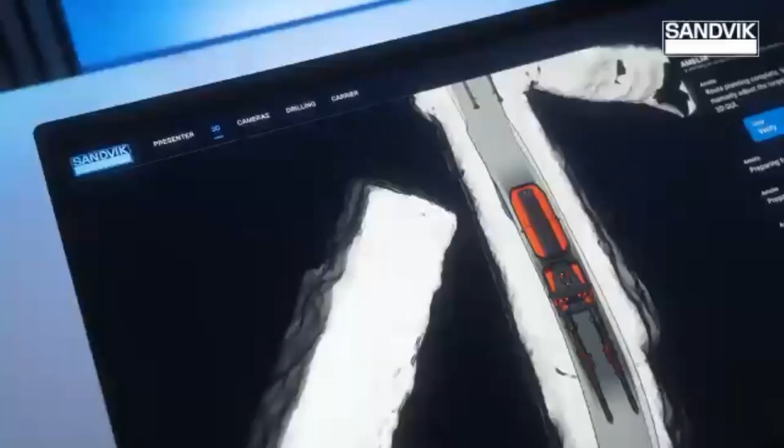Okay, excellent, thank you very much. So now I'm going to a really wild video. You got to admit, it's impressive to watch. The music, great - I think I got caught tapping to the beat and I wasn't on mute there.

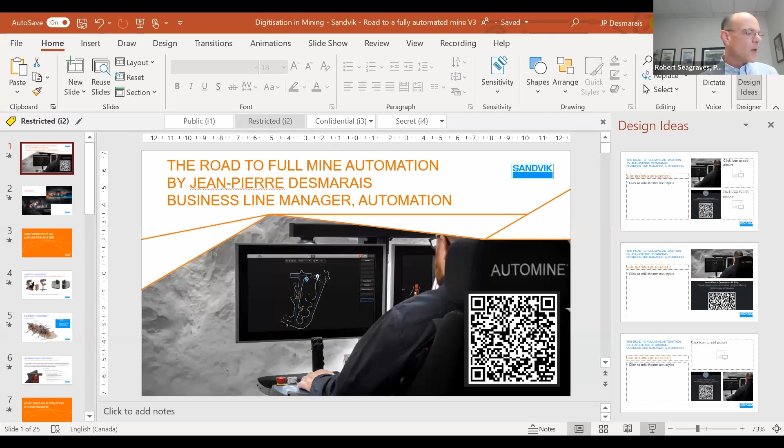I hope everyone can hear me well. Thanks for having me, it's a pleasure to be presenting to you guys today on behalf of Sandvik.

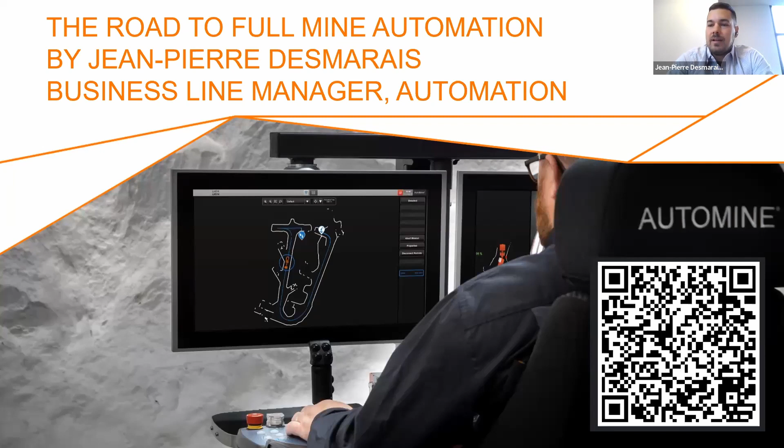We wanted to start this conversation with a bit of a technology video to show where we're at. I think, for myself and for the general public, it's important to know the commitment that Sandvik has toward investments in technology for mining. Amelia is certainly a big step forward for us in testing new technologies and bringing that forward to the mining industry, and we are committed to this by doing these concept vehicles.

We started 3 years ago with the concept loader, which was cabinless and used 3D LiDAR technology. We were able to test some of the early technologies that we're going to put in our equipment moving forward. So I think these concept vehicles are the testament to our investment in technology.

What I want to cover today is a bit of an overview of what an automation system is about, where we're going with it, what our vision is, and what you guys can expect from us in the future.

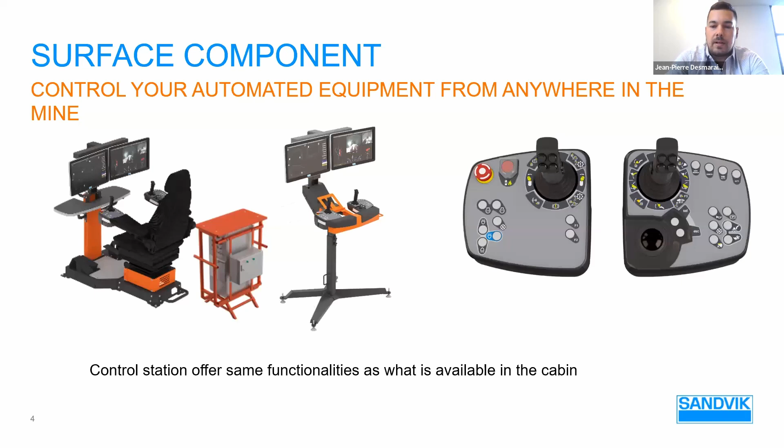So what are the components that you need for efficient automation operations, especially underground, though surface is similar. The first component would be the control room, where you need to be able to access the machine, communicate with it, and drive it. So you need the control system - we have 3 types: one is a specific chair, we have a pedestal stand that could either sit on surface or close to the area where the equipment is to work, or a desktop control system that you can see.

There's also the equipment component. This is an example of a loader, but it would be the same type of equipment you'd see on a truck, a surface drill, or even an underground drill. We retrofit our equipment with cameras, LiDARs, scanners, and computers to be able to control it from surface or away from the equipment itself, so it's drivable. To give you an example, for Sandvik equipment to be able to be automated, we're looking at anything past 2015.

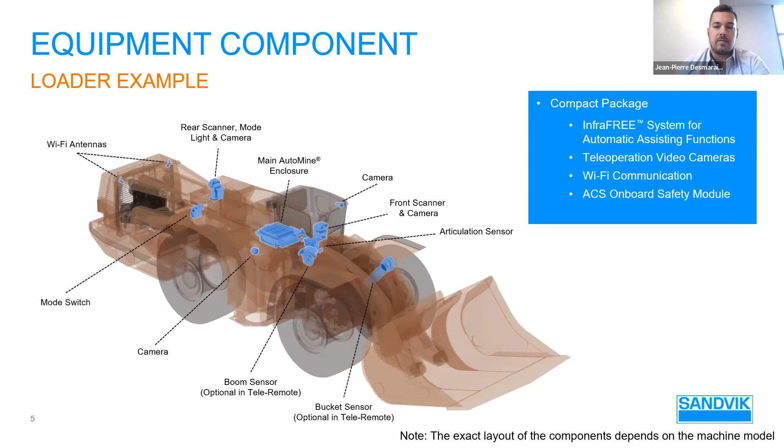The control system prior to 2015 is usually too old to be remotely operated from a distance. Line of sight mode still applies, but for complete autonomous operations we typically require a 2015 or younger machine to be automated. In the production environment, these machines usually get replaced within that time frame, so we usually find that type of machine.

In the underground component, current technology doesn't allow us to unleash the machines into work areas where you have manual equipment and pedestrians walking around. So we have a high safety standard, and we need to isolate these machines to make sure there's no collision between an AutoMine vehicle and a pedestrian or a light vehicle that's parked.

So there is a need for a physical person to come into the area to clear it, to make sure there is no obstruction in the work area, that it's deemed safe to operate in automation, and then we can resume automated operations.

We use two different types of barriers, one on the manual side and one on the automated side. The reason being is if the equipment were to malfunction, it needs time to stop between the light curtains before it hits the other one. And the same thing applies from the manual side.

So we calculate the distance between the light curtains based on the maximum speed the machine can reach on the actual decline. It's a simple calculation, but we make sure we have a safe distance so that in any type of circumstance, the equipment will have time to stop between the two light curtains.

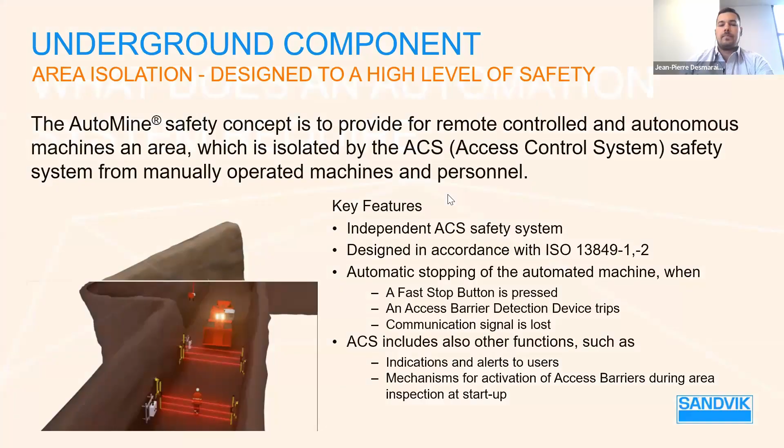So what does this automation system require? We're very demanding on network infrastructure underground, because we have standards for bandwidth and latency that are pretty high, especially for video. Usually the biggest demand on bandwidth for underground mines is automation.

The two major trends we're seeing across Canada and in the industry are LTE and Wi-Fi. From my personal experience, a lot of legacy sites that already have Wi-Fi infrastructure will continue down that path. Usually the newer projects or newer phases of mining will move into an LTE solution.

For us, we are network agnostic, so it's important that we can connect to a Wi-Fi network, LTE network, or even a 5G network. We just need a sufficient external client, and then we can connect to any type of service provider. We've worked with Nokia, Ericsson, Ambra, different types of providers, which is fine for us.

We are network agnostic. One advantage we see with LTE is there are far fewer handovers between access points, since there aren't as many access points going underground. Where we struggle with coverage underground for Wi-Fi is during that transition from access point to access point. Sometimes we lose communication and then we lose the machine.

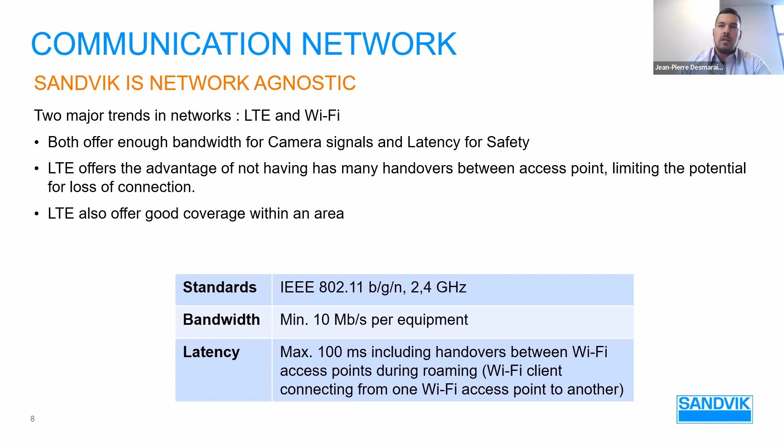In the automation system, the importance is continued communication. If you do lose communication, the machine will revert back to the safest situation and go to an e-stop, and you have to reconnect to the machine. The LTE has proven to be very reliable, although a lot of machines are currently run under Wi-Fi.

So what are we doing today with Sandvik Canada in automation? As you can see, there are quite a few different ways to run an automation system. There's a teleremote way, an assisted teleremote, auto cycle with manual activation, and fully automated.

Some of the operations are being done teleremotely assisted, and some of them are completely automated. One important thing to mention is a robot is very good at repeating the same task over and over again. A lot of people ask us if it's possible to run a fully automated cycle in a stoping application. It is possible, but it's a bit difficult, or even for a dumping into a truck operation.

We usually recommend people run that in teleremote, because in a stoping application, for example, it's very important for the bucket fill to be quite consistent, and the loader itself is not good at aligning itself to where it needs to be in the muck pile.

If you look at a block cave application, it works quite well because the drawbell will always bring the material in the same spot. So the loader can come in and pick up the material easily and have the bucket fill be efficient without any operator intervention.

The same thing applies in dumping. If you dump into a truck, the distribution across the truck is very important, so manual input and where the material sits based on fragmentation is quite important. In a truck loading application, we recommend having a teleremote operator coming in with some assistance of the equipment, but still manually teleremotely operated.

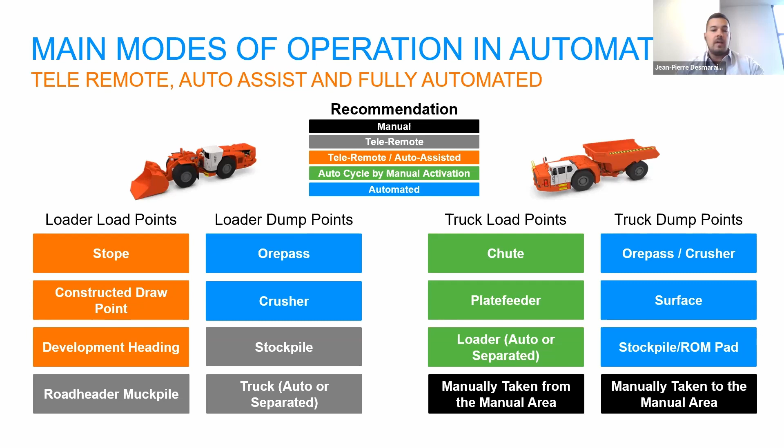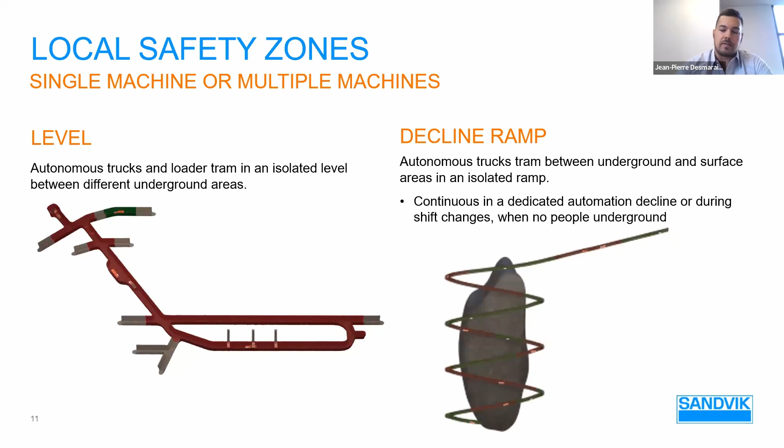Some of the approach we have is usually the entry to automation is local safety zones, where single machines or multiple machines will operate either on a level or in a ramp. It's an isolated zone that can work between shifts, or even during the shift. If it's on a level, you can subdivide some of the zones, but that's really where people start, between the shift, doing usually muck to remuck application, and then maybe loading some trucks during the shift from an isolated zone.

Some of the earlier applications we see, Glencore Kidd Creek is one of them. They have multiple loaders running with multiple chairs from a single control room. They are quite successful, and the numbers we see is the multi-machine system has been quite successful in increasing production effective hours by 30% compared to conventional loaders. So we are tapping into unused hours of operations that typically weren't tapped in before automation was available.

Then we could look at some hybrid models. We are using a lot of dynamic zones at the moment, so you could subdivide the level into multiple smaller zones, depending if you need to access a drill, for example, if you need some work to be done. We are able to merge and split zones as manual equipment needs to travel in certain areas.

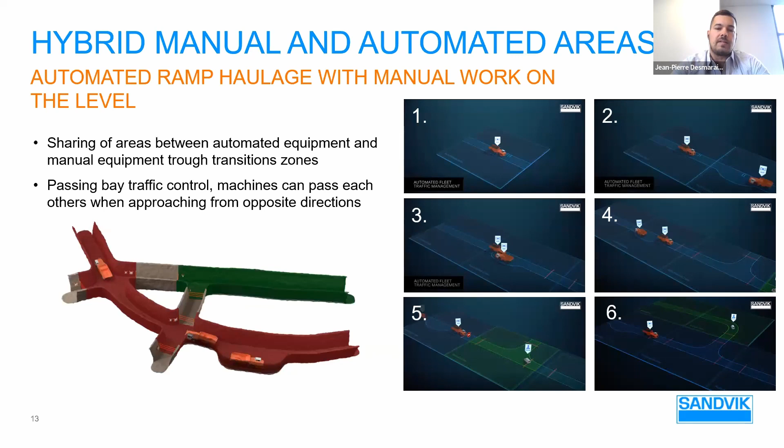You can see from 1 to 6 here, where an automated truck would wait for a zone to be automated. And then once the manual person or the manual equipment has cleared the zone, it becomes automated. So we're able to dynamically move from an automated situation to a manual situation. But the equipment itself always needs to be isolated from any pedestrian or manual equipment.

Hecla Casa Berardi does have a transfer level that they use, and they're quite successful. It's a closed off area, so they have the chute and they have a dumping area. They have the operator manually operating the chute, filling the truck, and then it goes to a dumping area.

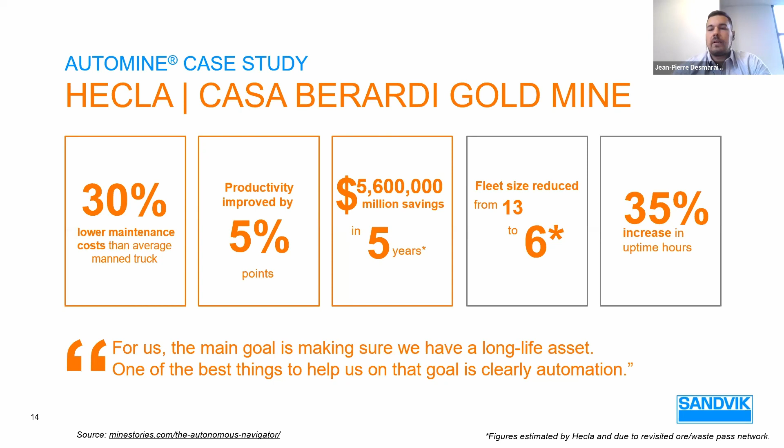And then the next level for us is really full mine automation. We call it fleet automation. It brings in the next level where we have traffic logic, interaction between different types of equipment, so loaders and trucks can interact with one another, different equipment types. Some of the drillings we're integrating, I'll touch on that in a bit, but it's really having a priority of equipment.

For example, there's a loaded truck coming up the ramp, and there's another truck coming down the ramp which is empty. The truck coming down the ramp would know somebody's coming up with an automated loaded truck, and would go to a passing bay and let the loaded truck through. So there is a prioritization, and there's even queue handling where, let's say there's 2 loaders coming into an ore pass, one loader gets queued first, and the priority loader comes in and dumps its muck into the ore pass first, then waits for the queued one to get out of the way and go back to the muck pile before it goes into the ore pass and dumps.

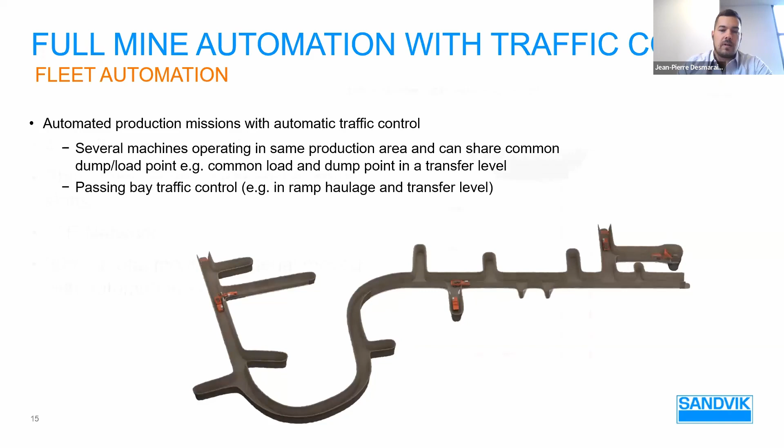So in that case, we can go up to having just a gated surface, and the whole mine becomes an isolated zone, and then we can run multitudes of equipment together into that zone. LZ5s in that case, they run 4 LHDs and 4 trucks between the shifts, and also on weekend evening shifts. The numbers are pretty impressive of what they're able to do there.

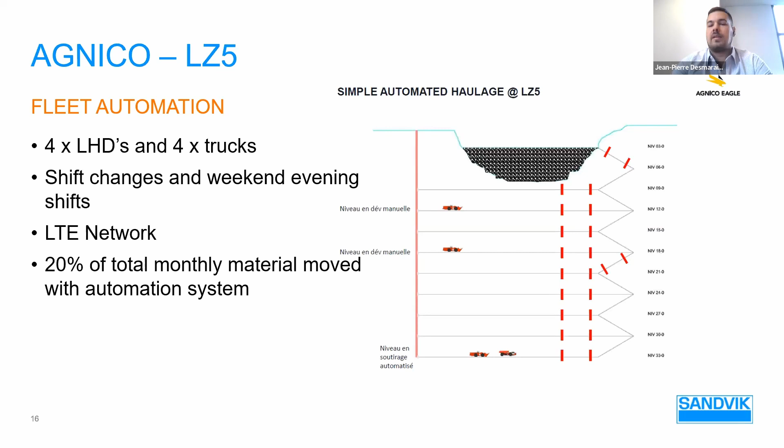They're up to about 20% of their monthly material move with an automation system. So in their case, automation is not an addition, it's something that they expect the mine to produce with. That 20% is not on top of their monthly targets, it's part of their monthly targets.

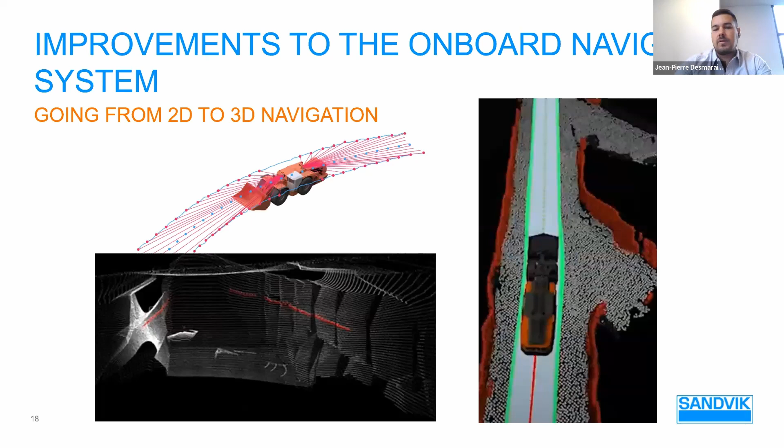In a 3D environment, you're always comparing yourself to the mapping, and then you can see if there's variance from the map. We're at that point where we're going to start doing a lot of 3D mapping using 3D LiDARs on light vehicles instead of using production equipment to do the mapping, and then slicing that into a 2D environment, and even using 3D LiDARs for navigation, like we did for Amelia, where she would position herself in the drift on her own, and then level herself into the right position. So 3D navigation is the way to go, and it's coming in the next short while.

The other aspect that we're working on is really interoperability. As most of you know, probably in automation systems right now, the load and haul sits on one side, the drilling automation sits on the other, and then all the auxiliary equipment sits outside of any OEM equipment. So we are working on providing more interoperability between equipment providers, and also between our own equipment, to integrate drills into the system, to make sure that, let's say there was a loader, it would know that the drill is there performing its work, so it won't enter that space. So interoperability is quite a topic at hand, top of list for us right now for 2023 in automation.

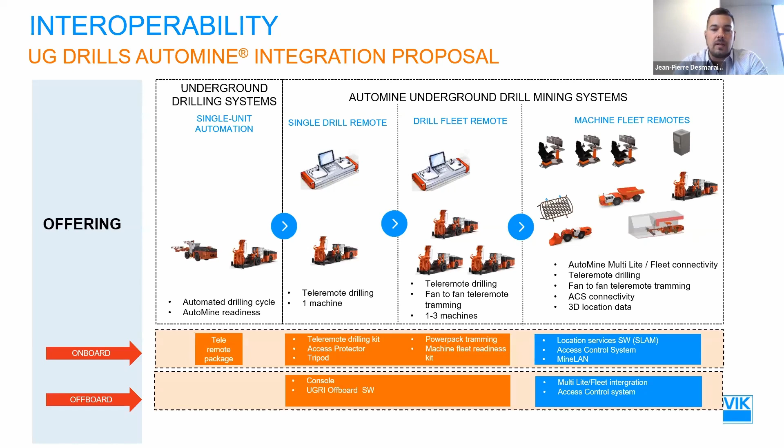So what's missing for a fully automated mine? Certainly for us at Sandvik, we are acquiring a lot of technology companies. You saw us acquire Deswik, and it goes back a bit to, sorry for jumping backwards, but to the interoperability. We want to be part of the whole mine plan, from the early design of the mine with Deswik.CAD, all the way to the operations management into Deswik.OPS, and then to the operations into automation and so forth. So we want to be part of that full mining cycle.

The other company we purchased is Newtrax, which is developing a collision avoidance system. And for us, that's really the next step for the automation system to be unleashed through manual people and machines. So I have 2 quick videos I want to show you about where this is going.

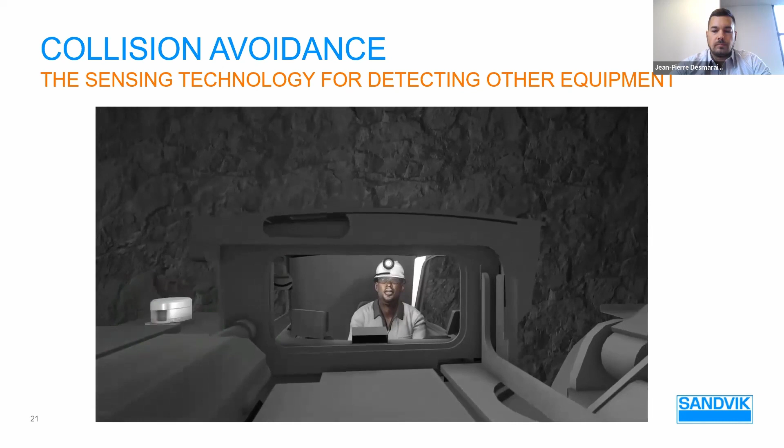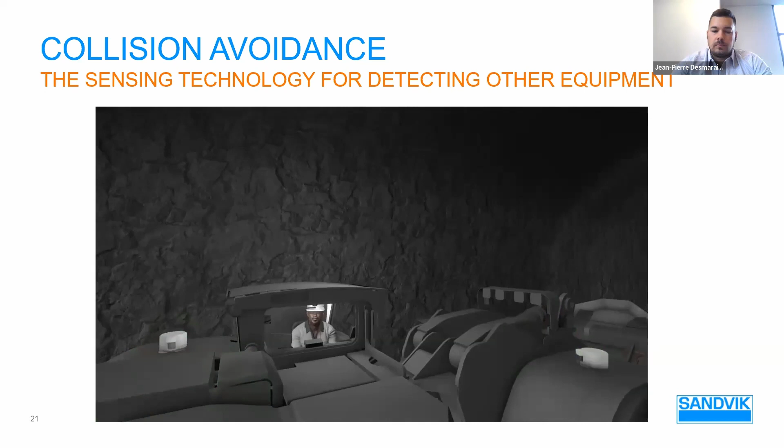The underground environment is full of hazards. We all have the responsibility of managing the risks associated with these hazards. In doing so, we can all work in a safe way and return home safely. Luckily, we have technology to help us manage these risks. The new CAS system can save the lives of your fellow workers, and maybe even yours.

Look, this is the new equipment I have been given. It tells me where all the hazards are around the machine, through this multifunctional display. It observes around the machine and warns me timely if there are people or other equipment in close proximity, even if I can't see them. It even tells me how far they are from my machine. Clever. It also shows me in which direction my machine is moving.

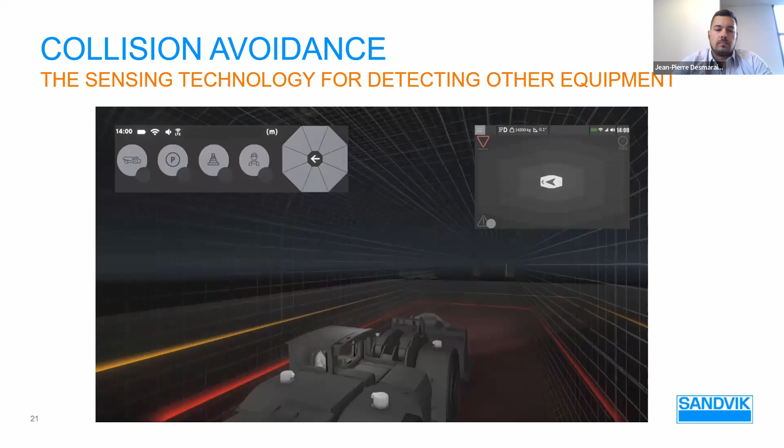Ah, here we are. See, there's another LHD standing there. Now watch the screen as I get closer. See how the screen tells me there is a vehicle, and it shows me where the vehicle is.

When I get closer, it will even tell me how far away the vehicle is. The lights and indication on the screen are still green. It warns me that there is something close by and that I must be on alert. Slow down. As we get closer to each other, we need to be more careful.

Did you notice the green light is now yellow? That means the machine is moving closer and is now in the alarm zone, which means we all must slow down.

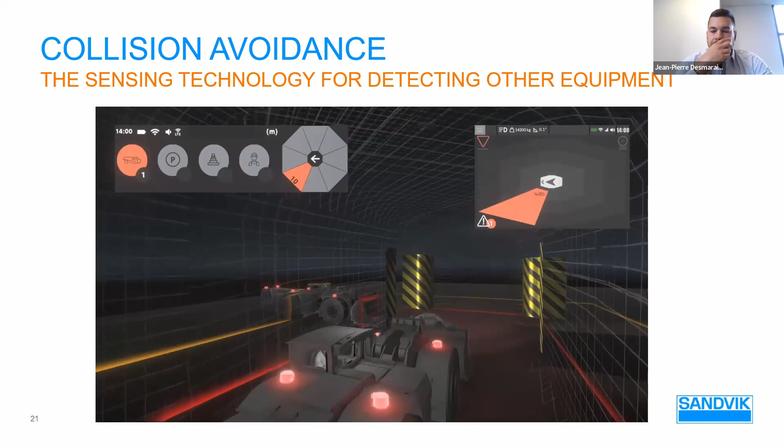I have slowed down, but the machines are still coming closer to each other. The red flashing light and red indicator on the screen tells me I am now in the danger zone. I must stop.

I do have another video for pedestrians, but it just uses a lamp instead of the interaction between the two vehicles. One point I wanted to mention is it's quite important for us to have—we see a lot of screens in the trucks and LHDs, and we decided to go down the path where we have a visual outline on the vehicle.

Those pucks on the outside of the vehicles not only include the sensors, but also include the visual light that would display the most imminent threat to a vehicle. So an LHD operator can know if somebody or a threat is coming, because it could be slowly approaching an LHD that's parked, but there's another vehicle that can come on the side, and that becomes the most imminent threat because the one a bit further away is parked and not moving.

So the visual inputs on the outside, where the LHD or truck operator would see, display the most imminent threat at that moment.

For us, it's very exciting thinking that in the near future—and again the big question is, when is that coming, that level 9, slowing to stop and unleashing the robots, like my ex-boss would say. We're really thinking around 2025, 2026, because of the legislative changes that need to happen in the mining industry to make a system functionally safe and make sure all the test scenarios have been covered before we unleash the robots.

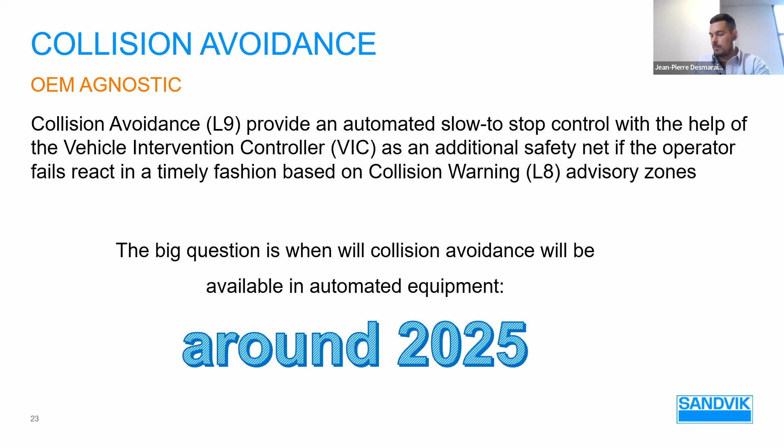I think that does cover my time. I don't want to get too much in detail. I see there's a couple of questions. I hope that was interesting. Oh, I apologize, I hope I didn't run over my time here.